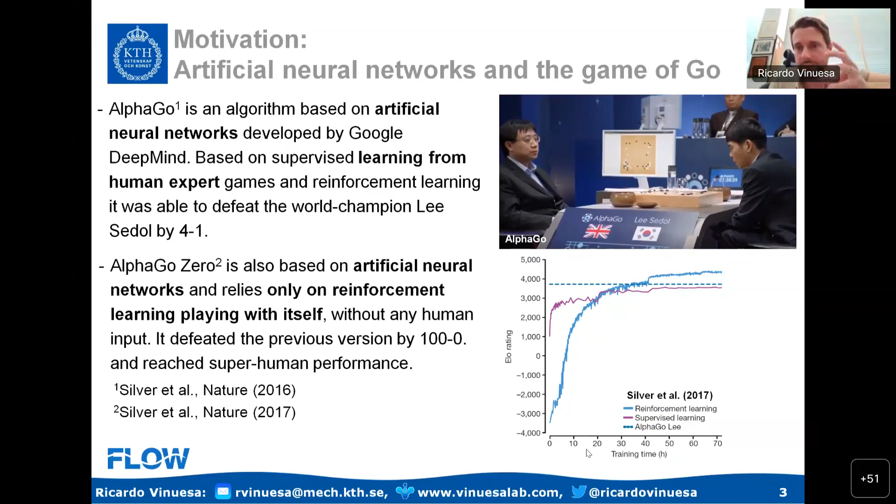So actually, there was quite some interesting potential of this technology for this narrow task without using any human input, just using the strategies that were developed through self-learning, playing against itself in this reinforcement learning context. So there are quite some interesting areas where machine learning can actually be applied.

We have a recent article in Nature Communications where we looked at how AI, more generally, can affect the sustainable development goals of the United Nations. It turns out that 79% of these goals can be positively affected by AI, whereas 35% can be negatively affected by AI. One should be aware that even if the result is mostly positive, there are many negative areas to be aware of when deploying these technologies, and the environment and the society appear to have the largest positive potential of this technology.

Now, we were talking about interpretability before. Of course, many of these deep learning models are actually acting as black boxes, right? So it's really not possible to establish a clear connection between the inputs and the predictions obtained from those inputs. And we argue in Nature Machine Intelligence that for any applications with some real impact on society, on sustainability, on engineering applications, one needs to develop interpretable methods.

And there is some interesting work from Cranmer and others from Princeton where they added layers of interpretability on already trained deep learning methods. And we argue in our paper that that can also be achieved basically by symbolic regression, so that one can make predictions that can, in fact, generalize sometimes even more than the original deep learning model. This is quite an up-and-coming area of research, and of course, this is very relevant for a very wide range of applications.

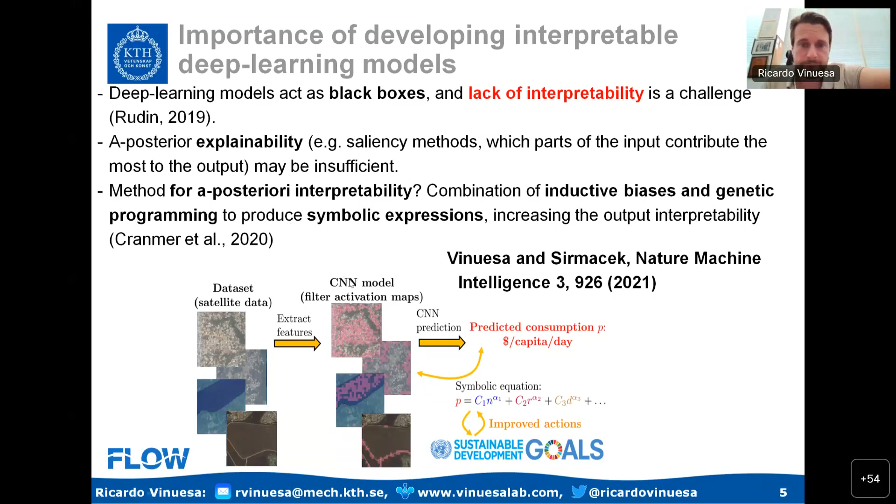My main topic today is going to be fluid mechanics. And machine learning has helped fluid mechanics in a wide range of areas. Perhaps a very seminal work 20 years ago by Milano and Koumoutsakos, where they could use neural networks to predict the near-wall region of a channel. That was quite an interesting seminal approach to these data-driven methods.

More recently, there have been studies looking at subgrid-scale modeling for large-eddy simulations, and RANS modeling as well. There has been quite some potential to generate synthetic inflow and boundary conditions that can help to produce more efficient CFD, which stands for computational fluid dynamics, so CFD simulations. And also, there are quite some interesting applications to flow control to reduce the drag or enhance the mixing, and to use PINNs, physics-informed neural networks, in the context of sensing as well. So there are some interesting directions where machine learning is already helping and can help even more for fluid mechanics.

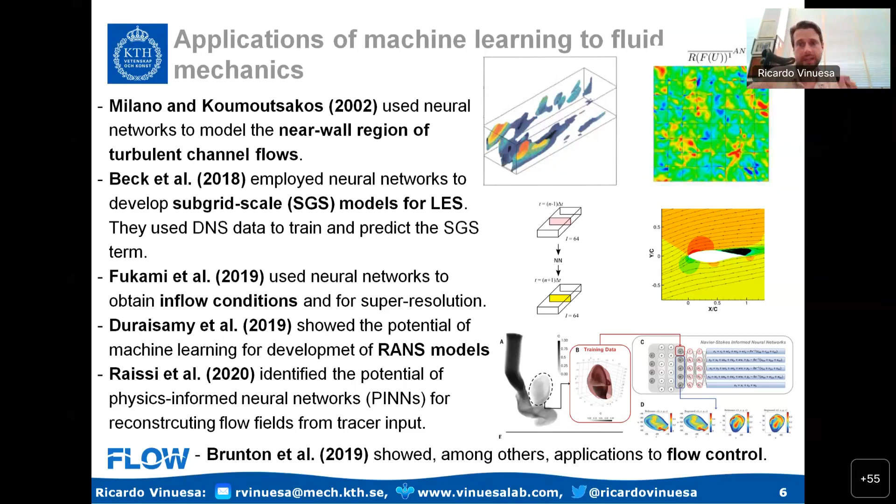In fact, we have just published in Nature Computational Science a review article together with Steve Brunton, where we highlight the potential of machine learning for CFD, for computational fluid mechanics. And what we find is that there is quite some potential to accelerate direct numerical simulations, to improve the modeling, both in the context of LES and RANS, and to improve the robustness and generality of reduced-order models. And I will be talking about that also later in this presentation.

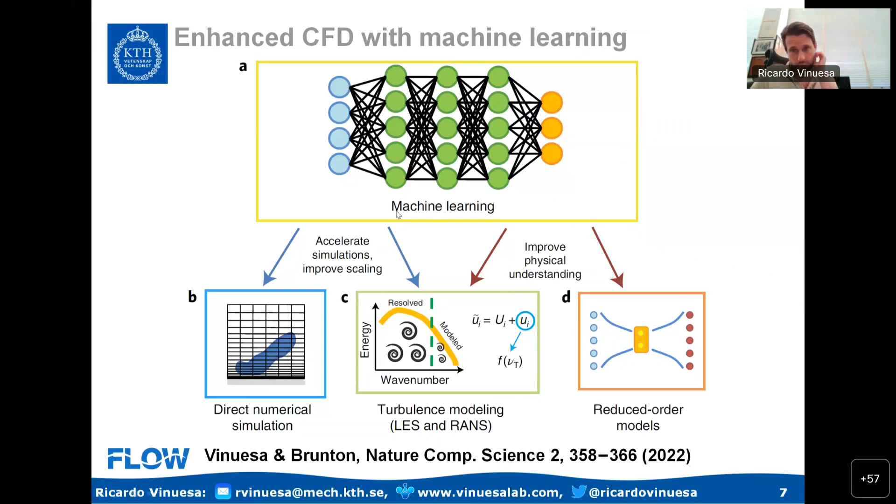So both in terms of modeling and acceleration of the simulations, there is quite some potential for machine learning, and you can read more about our perspectives in this review article that you can find here in this reference.

Okay. So today, I'm going to focus on several examples where we have used machine learning to either help the modeling of turbulent flows or enhance possibilities for controlling those turbulent flows. And the first example is what we call non-intrusive sensing. In non-intrusive sensing, we want to measure at the wall so that we can predict what happens above the wall in the flow without having to stick sensors in the flow itself.

Because of course, when we start to put the probes, we're disrupting the flow, we're creating other effects, and it's quite efficient to actually measure just at the wall and perform that prediction dynamically at each time step. So what we use is three quantities that we measure at the wall: pressure and the two wall shear stress components. And we use computer vision techniques, CNNs, but also other tools to predict what happens to the three velocity fluctuations at different wall normal locations above the wall. So above the wall, we can actually predict.

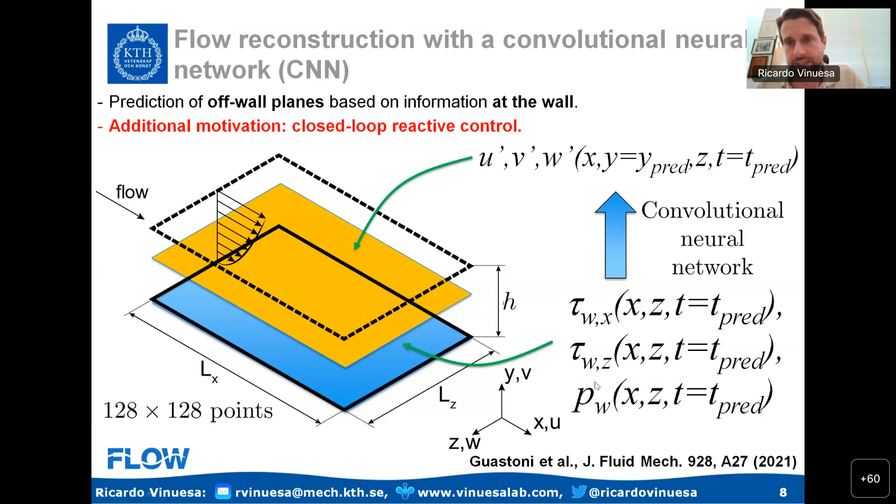And one motivation for this non-intrusive sensing approach is flow control. Because if we know what is happening in the flow at each instant, we can design better controllers to be able to reduce drag or do any other application that we may want to do with the flow. By the way, these results are presented in the Journal of Fluid Mechanics, so you can see the reference here by Guastoni and others, published last year in 2021. Okay.

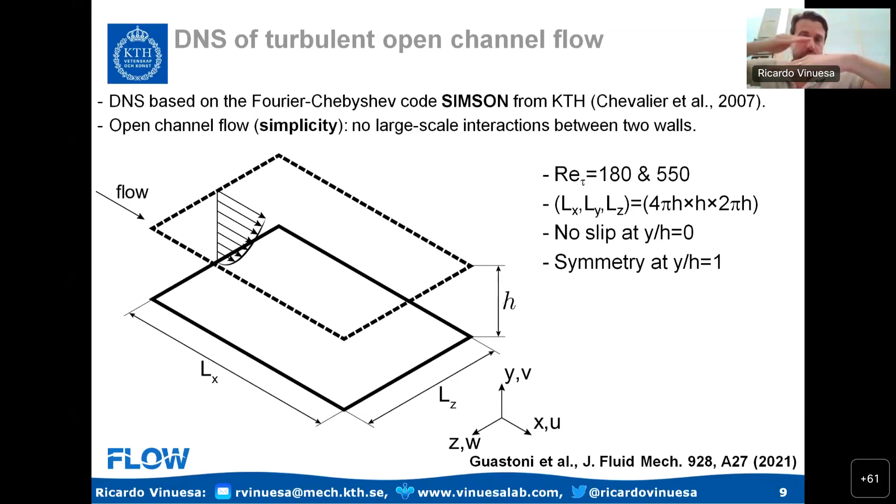So the first thing that we do is that we create a database of direct numerical simulations, DNS data, using a Fourier-Chebyshev code, and we consider a turbulent open channel. So we have one wall and a symmetric condition at the top. That's just to simplify slightly the dynamics of the large scales. We consider two Reynolds numbers, friction Reynolds numbers of 180 and 550. These are the domain sizes, which are large enough. And we use this DNS data, this highly resolved numerical data of the flow, to be able to train deep learning models to make the predictions that I was mentioning. So from the wall to above the wall at different locations.

And what happens is that turbulence exhibits coherent structures, right? So turbulence has certain patterns. And if we look at the wall, those are going to be 2D images. So of course, fully connected networks are not going to be very efficient in this sort of prediction. And we go to computer vision. So we start with CNNs, convolutional neural networks, to be able to exploit the spatial correlations of the data, which correspond to the coherent structures present in the flow, to be able to leverage those and improve our predictions.

So in CNNs, and I guess most of the audience here is very familiar with them, we essentially have a kernel, a 2D kernel, which can have a certain depth as well, which is sweeping through the input image. And then we obtain a feature map based on these convolution operations that are being applied. And in this case, since the kernel has size 3 × 3, each of the grid points of the output feature map receives information from 9 grid points of the input. And that depends on the kernel size and how we are designing the convolutions.

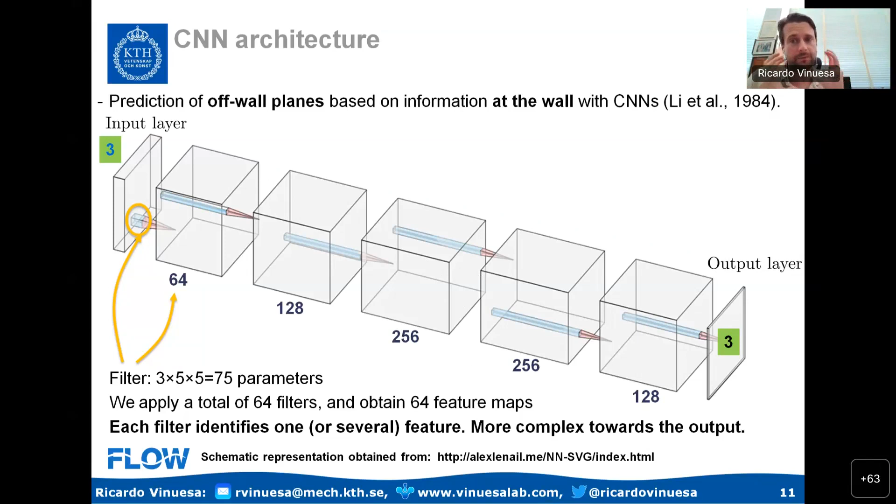So there's a quite nice fit there to predict turbulent structures. One additional note is that we have now been working on even deeper networks. So if you maintain the number of parameters constant, which means that we reduce the number of filters per layer but increase the number of layers, you can actually get even better predictions. And that goes in the direction of this concatenated application of convolutions that help us to really build very good and realistic coherent structures. Okay.

So this is how the CNN looks like. And again, this is the reference in JFM. So these are the three wall quantities that we are using as input. And these are the three velocity fluctuations that we're trying to predict. Okay.

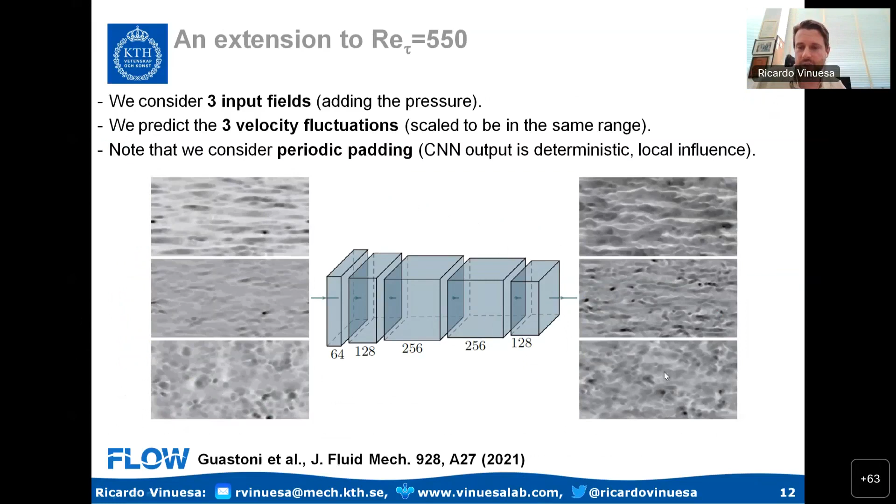Everything that I've shown you so far is what we call the FCN method, the fully convolutional network, which relies on taking information at the wall, which is just going to be a 2D plane, and predicting directly the information above the wall, which is going to be another 2D plane. But something that one can do instead is, rather than predicting directly the full plane, to do POD, proper orthogonal decomposition, or principal component analysis, depending on which is your community. So one can do POD on these subdomains.

Therefore, what we do is that we separate the spatiotemporal problem into spatial modes and temporal coefficients, and then we only need to predict the temporal coefficients of those modes, right? So this is in principle an alternative approach that can help us in certain cases, and this is documented in these two references, and this will be denoted as the FCN-POD method. So we will have the FCN and the FCN-POD.

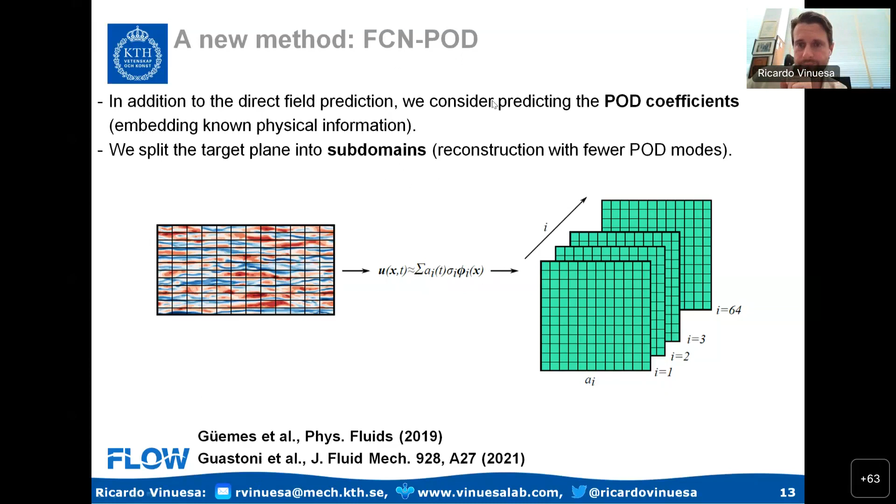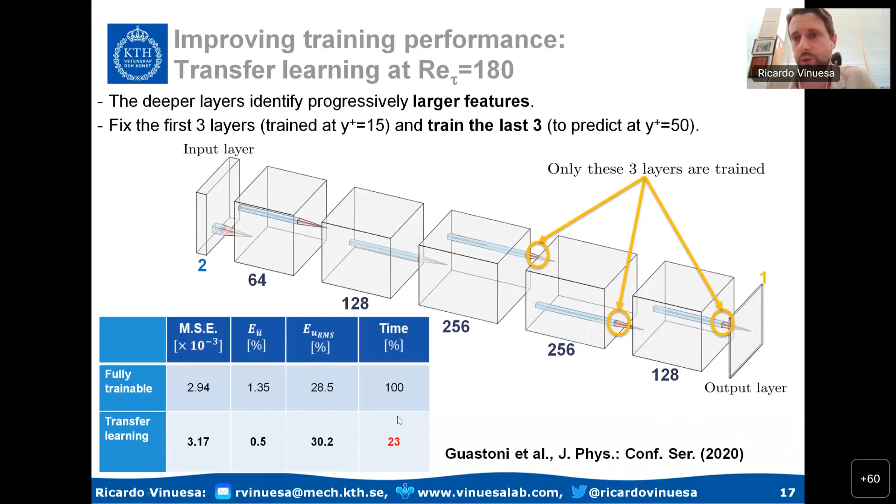And you can see all these results in the Journal of Physics Conference Series, also by Guastoni and others. Through transfer learning, we can get the same level of accuracy as with the original network, but reducing the amount of training time by a factor of more than 4. So we can actually train these networks for turbulence predictions in a more efficient way.

We also did this in the context of Reynolds number effects. So we took the network that we used to make predictions at Re_tau 180, and the training at Re_tau 550 was initialized from the weights of 180, right? So we transferred the weights, and instead of having random initialization, we just started with the weights of 180. What we can see is that we can reduce the amount of training data again by a factor of 4.

So we can actually obtain the same level of accuracy, but reducing much more the amount of data, and in this case, the simulation at 550 is much more expensive than the one at 180. So if one can do most of the training with a very cheap simulation that you can basically run on your laptop, then the requirements for high performance computing are significantly reduced, and we are doing something quite effective for the training of our deep learning models.

Now, what happens if instead of having the full signal at the wall, with the DNS level of resolution, you only have a few sparse measurements there, right? Which is what would happen in a wind tunnel experiment, in a real-world realization of this. Well, what we did was to employ generative adversarial networks, GANs, which again, many of the people in this audience are familiar with. This is a schematic representation of the GANs, in which we have two parts: the generator and the discriminator.

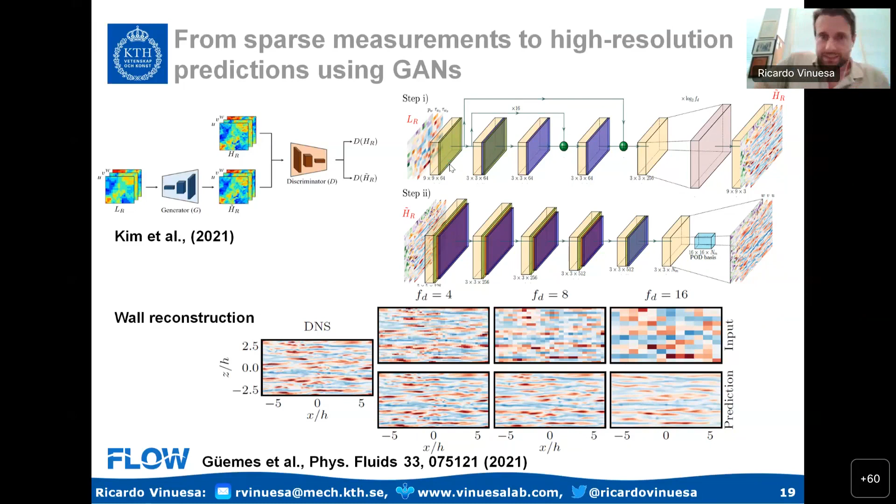So even if I want to target large-scale control, we can actually get very effective control approaches to be able to target these structures. So even for an experimental realization of this non-intrusive sensing plus flow control strategy, we can actually get very, very good results that can help us in the context of closed-loop control.

Okay. So everything that I discussed so far was based on predictions from the wall to above the wall for non-intrusive sensing. But one can think of the opposite problem. What happens if I want to use information from far away from the wall to predict the flow closer to the wall? And this is an important problem when one is thinking about off-wall boundary conditions, where one wants to replace the whole near-wall region by a boundary condition where you can develop good wall models.

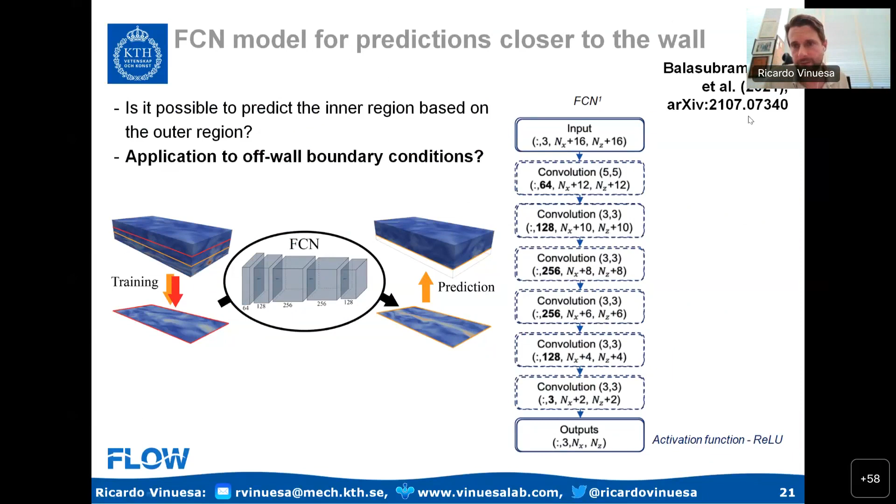And we try to use this via CNNs, right? This work, you can find it in arXiv, and this was presented at ETMM last year, so you can find the arXiv preprint in there. And essentially we try to reproduce some of the work that was done by Mizuno and Jiménez. So what they did is that they took the overlap region of a channel and basically rescaled the input and set it at the location close to the wall to develop a wall model. We tried to do something like that using CNNs.

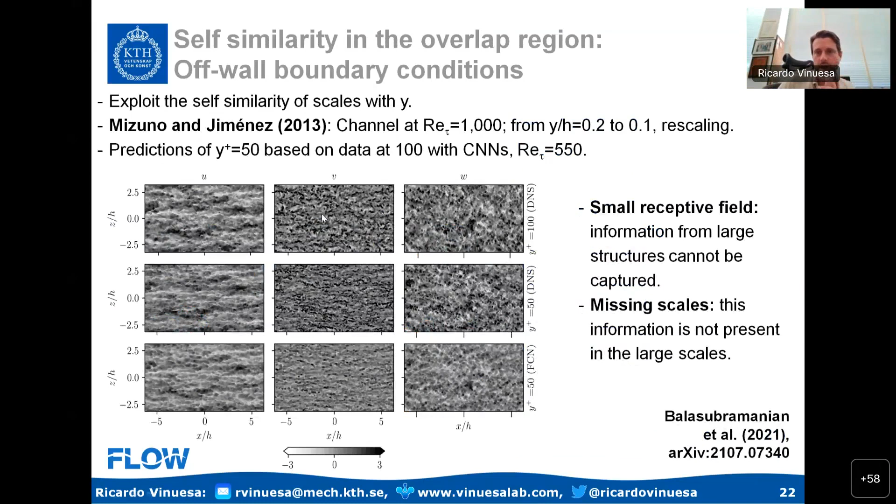And we consider the case at Re tau 550. We are having in the three columns the U, V, and W fluctuations. The input is at y plus 100. So these are the three input quantities. The output, so the prediction, which is closer to the wall at y plus 50, is the second row. So we're trying to predict these quantities over here. And the predictions are the third row that you can see here.

So we can actually see that visually, the instantaneous flow is in quite good agreement, and if we compare the second and the third rows, we can reproduce most of the features of the original data quite well. But this prediction is inherently more complex than the previous one for two reasons. When you're using the outer flow to predict the flow closer to the wall, you miss the effect of the small scales that is imprinted at the wall. So that's already missing when you're trying to make those predictions.

And second, when we are trying to use a CNN to predict from the large scales as input, the receptive field is going to be a small part of those large scales, which also complicates extracting the relevant information from those scales to make my predictions.

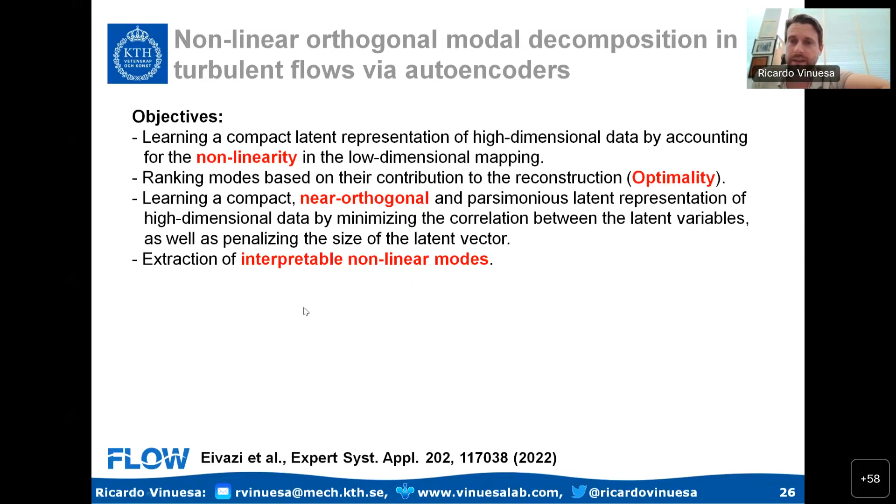So we consider different autoencoder-based architectures. The first one is the classical CNN autoencoder. As mentioned before, turbulence has certain spatial information and spatial correlations that can be exploited through CNNs.

That's why we employ the CNN autoencoder. As many of you know, an autoencoder is a deep learning architecture in which you're trying to reproduce the original data, reconstruct the original data, but you're applying progressively dimension reductions until you find a very compact representation of the original data in the latent space, right? Which is the bottleneck of the autoencoder. So this is the CNN-based autoencoder, quite standard.

The second one is the hierarchical autoencoder. And this one is aimed at obtaining the optimality property of POD. We want to obtain modes that are ranked based on their contribution to the reconstruction. And this was proposed by Fukami and others. The way that this works is that you have first an autoencoder configuration where the latent space has size 1, and that allows us to obtain the first latent variable, the first latent vector.

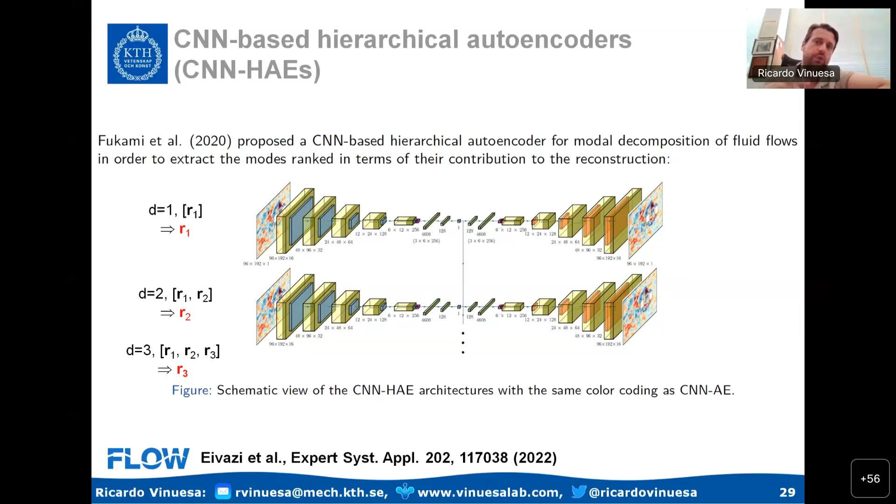Okay? None of the autoencoder configurations that I mentioned so far gives you orthogonal modes, and that's a desirable property if you are building a reduced order model, because you want the modes to be interpretable. Okay? To be able to embed the orthogonality, we consider beta variational autoencoders, which are ways in which we can introduce stochasticity in our model. So we consider that P of X is the distribution of the original data, P of R is the distribution of the data in the latent space, okay?

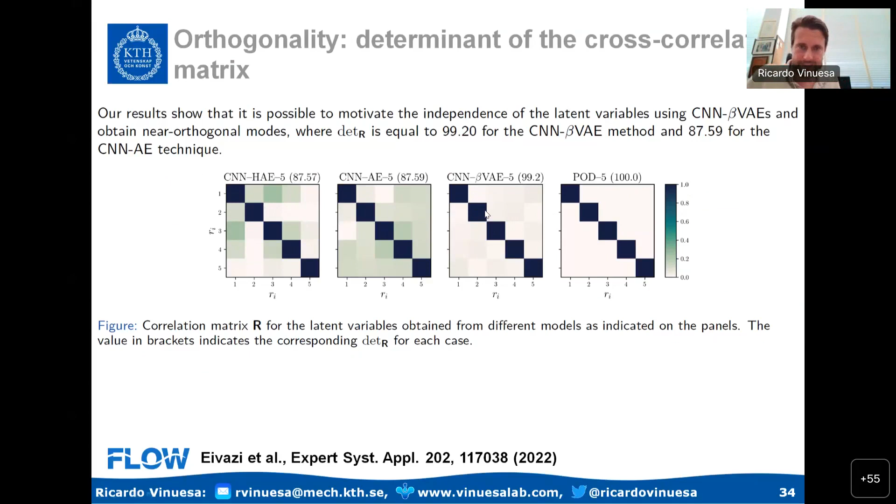And for the beta variational autoencoders, what we also did was to develop an algorithm for the optimality. So we are able to recursively classify the modes in terms of their contribution towards the reconstruction of the signal, so we can rank them from more to less contribution, meaning that we have an optimal reduced order model and an orthogonal one, right? So in the case of the beta variational autoencoder, those modes are very orthogonal. And why is that important for interpretability? I'll give you an example.

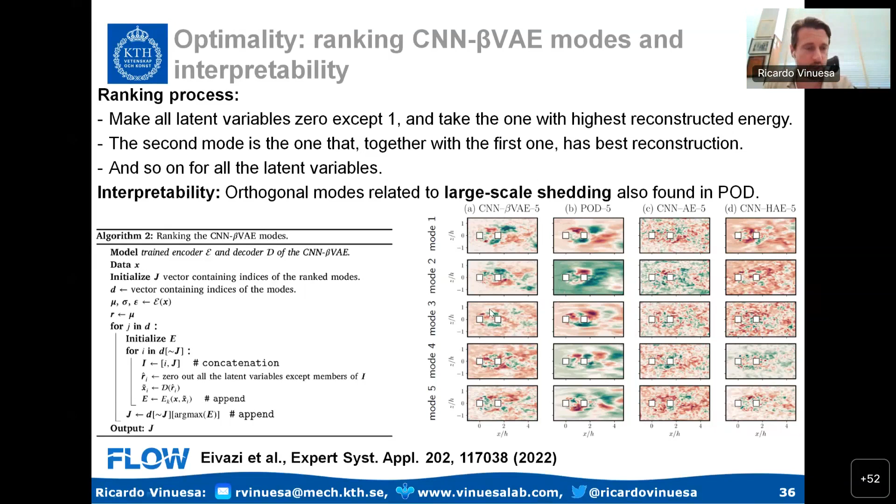And the last example comes from deep reinforcement learning for flow control. This was presented by Guastoni and others in the APS last year. Essentially, when we have a reinforcement learning framework, I have an agent, which would be the neural network, which is interacting with an environment, which would be the flow simulation that we are trying to develop.

Well, given the state of the flow, we decide some actions to be applied to the environment, and we obtain a certain reward that we want to maximize. So the goal of reinforcement learning is to develop a policy pi such that, given the state of the system, I can decide what are the best actions to be able to maximize the reward, which in our case will be to obtain the minimal drag in the channel.

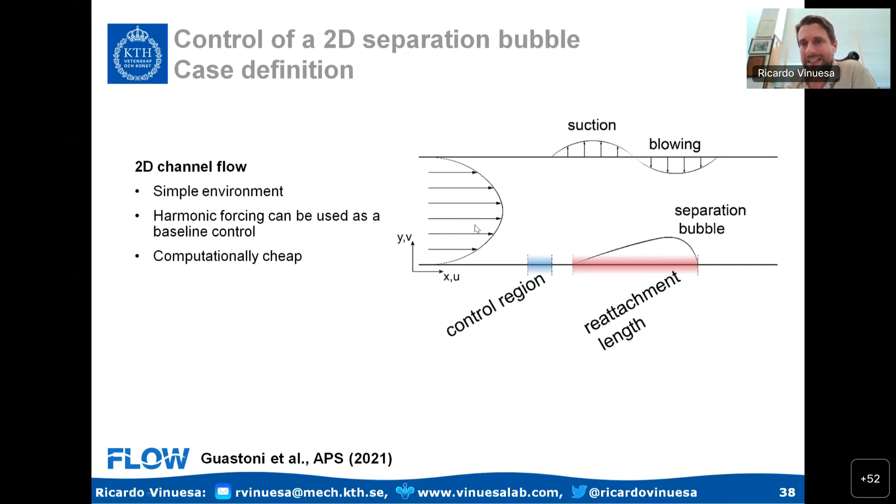In this case, we consider an easy example, a 2D channel, where basically through suction and blowing we induce a separation bubble at the lower plate, and through actuation upstream of that bubble, we want to reduce the length of that recirculation region. We have a classical solution that is periodic, and we want to see whether reinforcement learning is going to provide us a more nuanced, more sophisticated control approach.

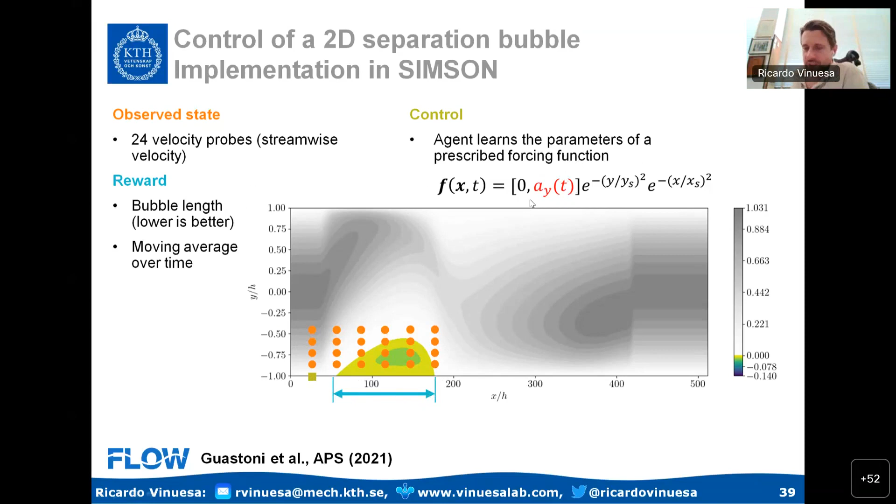What we do is we observe, so here is the flow field. In colors, you can see the negative velocity, so this is the bubble. The dots are the probes that we are using to sense the flow. The arrow will be the reward, so we want to minimize the arrow, the separation length. And this square here is where we set up the actuation, which is modeled through a body force that emulates blowing and suction, and we are trying to get the amplitude of this body force. So this is the setup for this 2D case.

We can compare the reduction of the separation length with the DRL and the periodic forcing. In the periodic forcing, we have around 20% bubble reduction, whereas with the DRL we get around 30%. So we get better performance with the DRL than with the classical solution, which is a single frequency and a bit more simple. And we are extending this DRL framework for flow control to perform opposition control in turbulent channel flow, to minimize the drag and control turbulence.

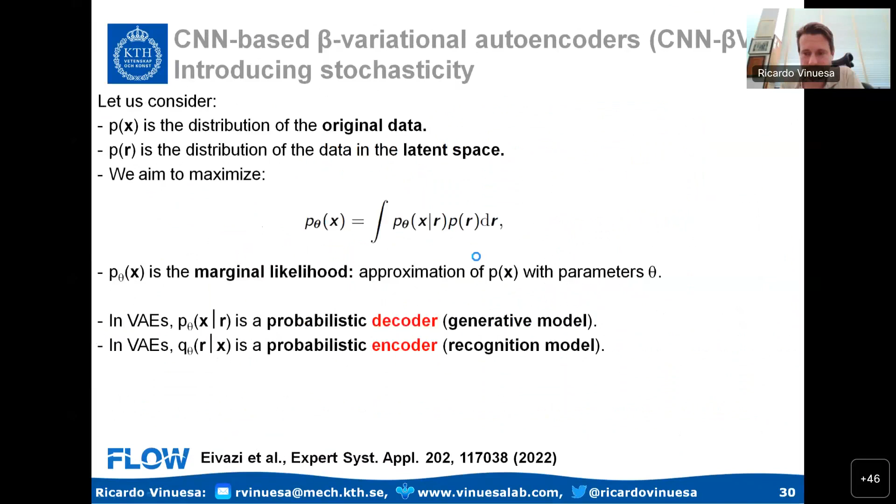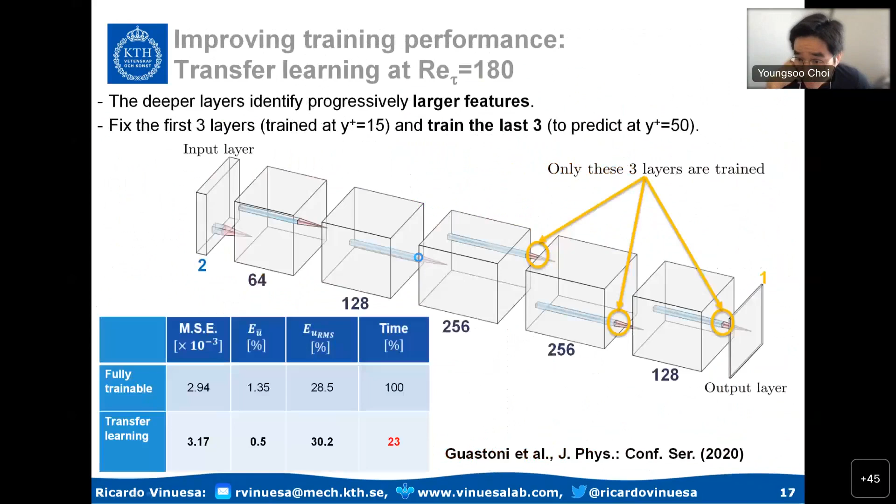So because we do predictions of 2D planes, it's a bit more difficult to get the three-dimensional distribution with conditional averaging for the different events that could happen. But in some recent work that we are currently conducting with my colleagues in Madrid, we are actually doing predictions of the 3D flow. So we're using GANs to do non-intrusive sensing of the 3D flow.

And then these conditional representations of the flow on particular intense events can be viewed in more detail in those 3D cases. Since these are 2D, it's a bit more difficult to really get good representations of the events in that conditional average. All right.

Well, thank you. Next question is by Pat. He asked, could you revisit what you are predicting? What are you comparing? It's related to the previous question. I mean, RMS has always been a questionable metric, but at least I want to understand where it's coming from. What are you comparing? Yeah, RMS, in the context of wall-bounded turbulence, this is a pretty standard physical quantity. I believe it's standard.

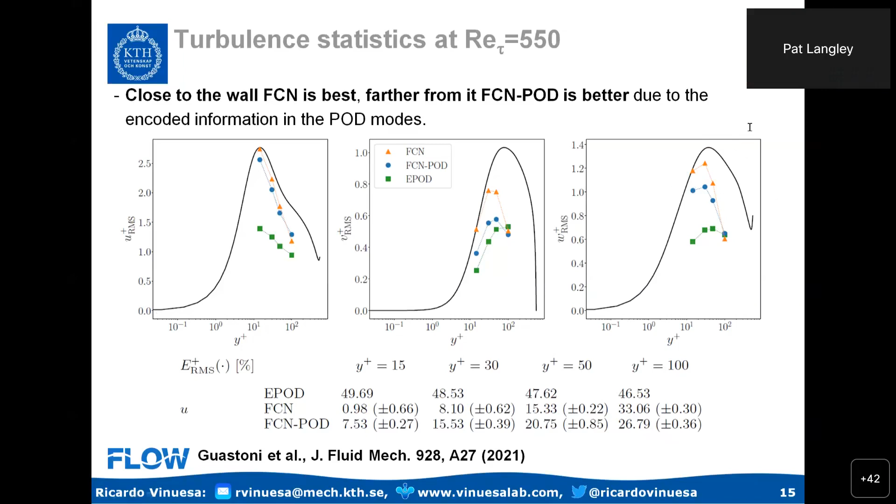It's just that if you start putting that in papers, you're going to make them less accessible to people who don't know what's going on. And AI in general, maybe fluid dynamics too, has really overused acronyms like this for decades. I just wanted to discourage it. That's why I was making fun of you. Well, unfortunately it's getting popular these days. I believe it. That's why we have to stamp it out now. Well, at least I highlighted in my slide what it stands for. But I agree that there are too many acronyms. That's absolutely true. All right, sounds good.

I mean, part of it is that I'm concerned, especially about hiding it, people are going to say physics informed neural networks as opposed to physics informed other approaches, because there are other approaches to doing physics informed model discovery. Yeah, that's true. So there's a subtle distinction that we have to be clear about. And I agree. In particular, PINNs.

From the name itself, you don't get the full picture of what it actually is, because it's more using the machinery of deep learning to solve PDEs. It's not so much embedding physics in the network. It's more just solving a PDE with the machinery of deep learning. So even in this case, there are some things one could actually argue about the name itself. So yeah, it's important to know exactly the methods that we are talking about and what they actually do.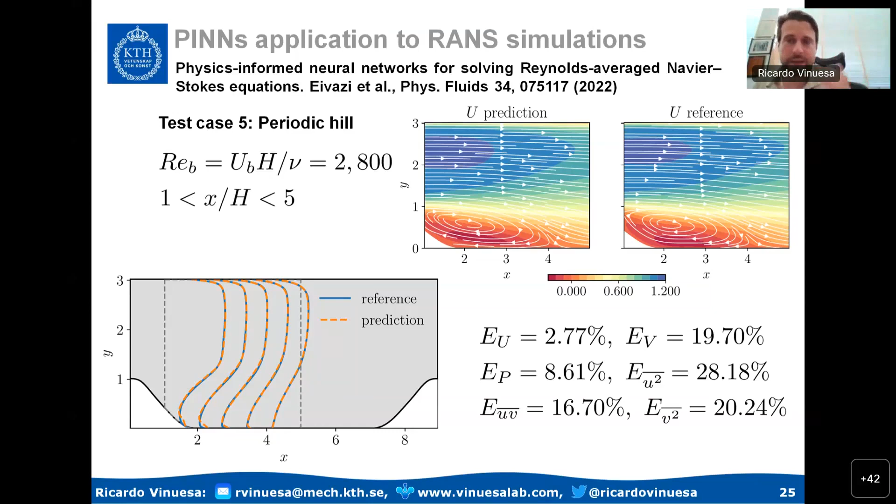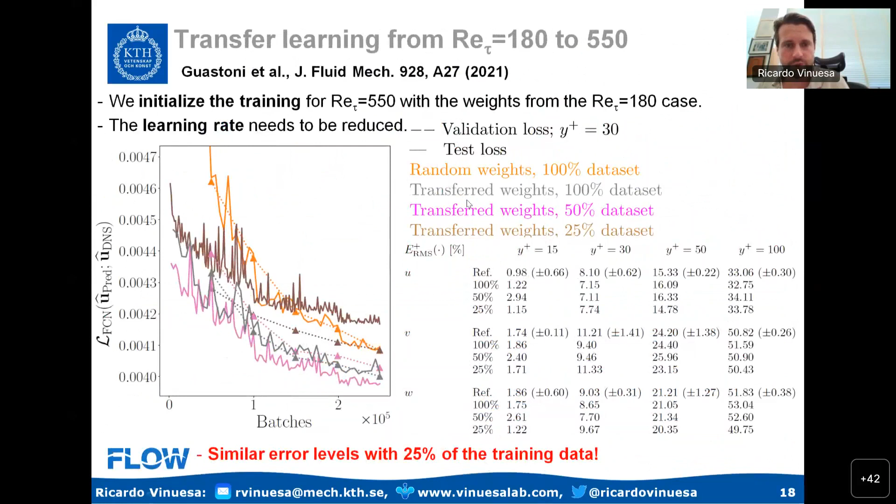But of course, another way that we have tried is through embedding in the non-intrusive sensing. So in these predictions that you see here, you can use some of the physical properties that you know about the flow, for example incompressibility, to simplify your prediction. So that becomes an additional step on the data-driven approach that you're using. Embedding physics in these neural network models becomes a little bit confusing with the nomenclature, because there are many different ways of doing it, and they get confused quite easily.

Yes. All right. Let's move on. The next question is by Jeremy. For the channel flows, do you have an impression if wall shear stress or pressure is more predictive for velocity fluctuations? I think pressure measurements may be easier for an experimentalist.

Yeah, that's a very good question. You're right. Pressure measurements are easier from an experimental point of view, although wall shear stress measurements are becoming more and more feasible with enough spatial resolution. It turns out that to predict u', the streamwise wall shear stress is the most important quantity, which makes sense, because they both contain information of the streaks. To predict v', the pressure is the one that is more important. So depending on what you want to predict, you may have to measure different things.

And this is something that we have also been analyzing in the context of the Shapley framework for explainability. This Shapley framework gives us something very consistent with the physical intuition that one can get for these flow cases.

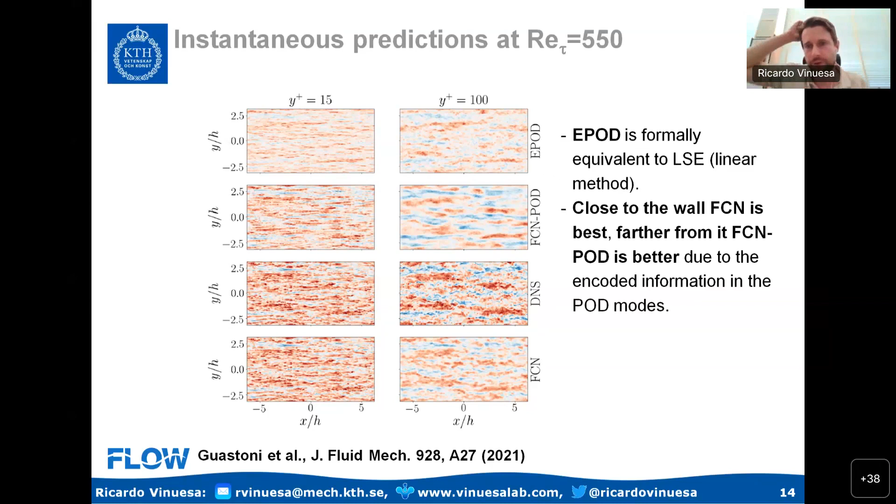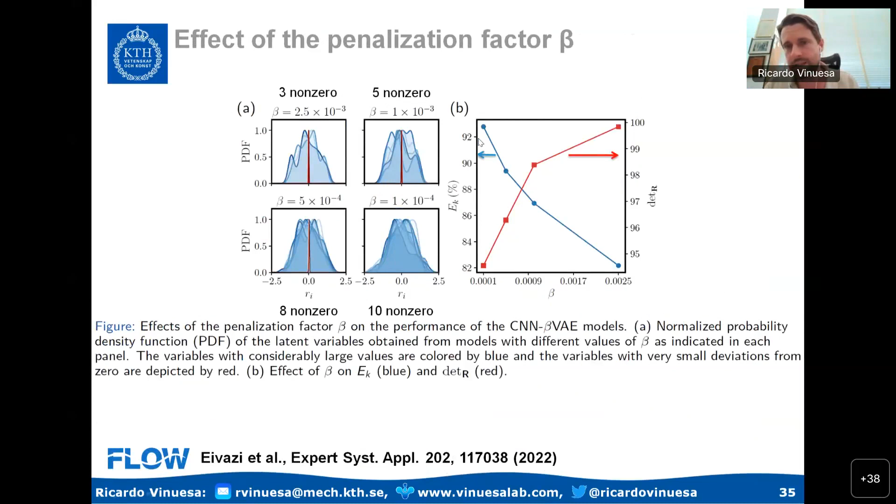For the reinforcement learning, it's expensive. Here I have some results as a function of the time step in a particular episode, but we're talking hundreds of episodes. These are the time steps of a particular episode, and that's for the 2D case. For the turbulent channel case, one needs even more. But we're using a framework where we have parallelized the exploration space, so we can have 16, 32 different processes running episodes in parallel and communicating, so that it can be done a bit more efficiently. But the exploration is quite costly in these cases, yes.

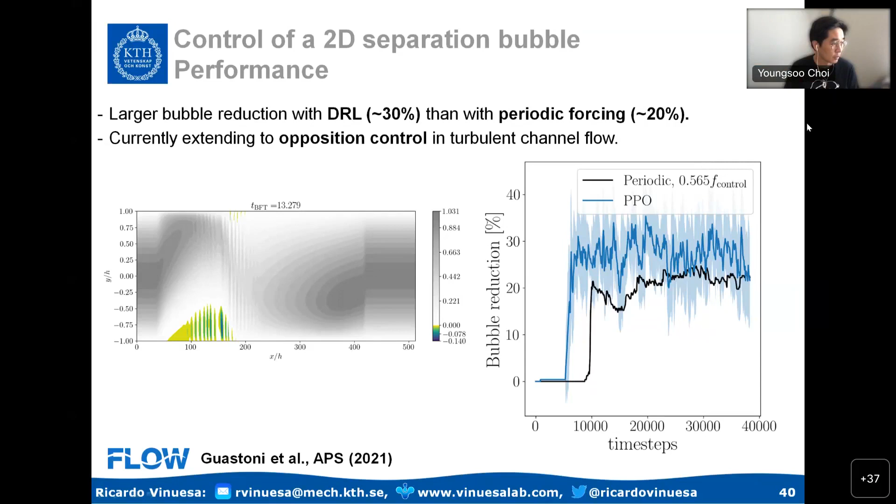Okay, going back to the PINNs, my questions. You need the collocation points. Yes. So how many collocation points did you use? This gives you an idea; this is an extra slide of the periodic hill. That's a typical mesh that we have for the periodic hill, so basically the amount of collocation points is a trade-off.

You don't need to resolve the gradients as much as you have in a RANS simulation. You have a coarser mesh, but still you need to be able to propagate the information of the residual from the domain to the boundaries, because the loss function needs to also match the boundaries. So you cannot get away with 3 points or something like that. You need a reasonable resolution, but it can be coarser than with other numerical methods. Right. Okay.

If you go to slide 27, you apply the autoencoder to some sort of 3D channel flow problem. The urban environment, the simplified urban environment. Oh, simplified urban environment. So the size of the data would be not this one, right? A high resolution.

So how big is the simulation data? So these are 1,200 instantaneous fields. This is a simulation that, if I remember correctly, is around 100 million grid points in the full domain. And we extract a 2D plane that is at the center of the obstacles, so cutting through the middle, and it's spectrally interpolated on a mesh of this size, so 96 times 192 grid points. So we really reduce the amount of data from the problem, although the multi-scale character of the complex turbulent flow is present in these snapshots that we consider.

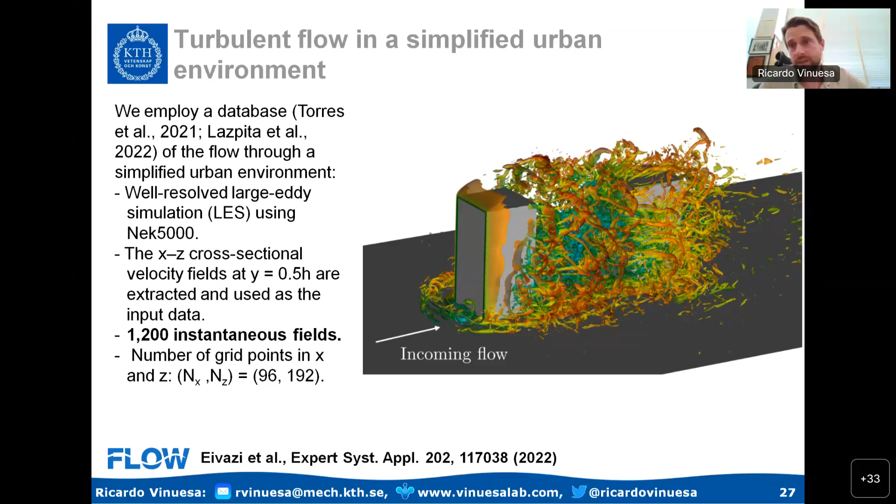All right. Another question by Juan. He asked, did you try different sampling strategies for the work of RANS with PINNs? And if so, did it make any difference in the results? What do you mean with sampling? I think he meant the collocation point selection. If you mean the grid, yeah, the collocation. Exactly. So for the collocation, it's connected with a discussion that we were having before. So yeah, we had to play a bit with the distribution of the mesh.

It's convenient to have, as you would have in any numerical method, finer resolution where there are larger gradients, but it's not a big requirement because of the automatic differentiation. The more important thing is that the points are quite uniformly distributed through the domain, so you can actually match effectively the boundaries. So that's the key. Because the problem with PINNs is that they will always give you something, even if the boundary data is not consistent with the flow, and things are a bit tricky. So you should make sure that your mesh is at least fine enough to be able to propagate that information effectively. And the quality of the boundary conditions is going to define also the quality of your solution.

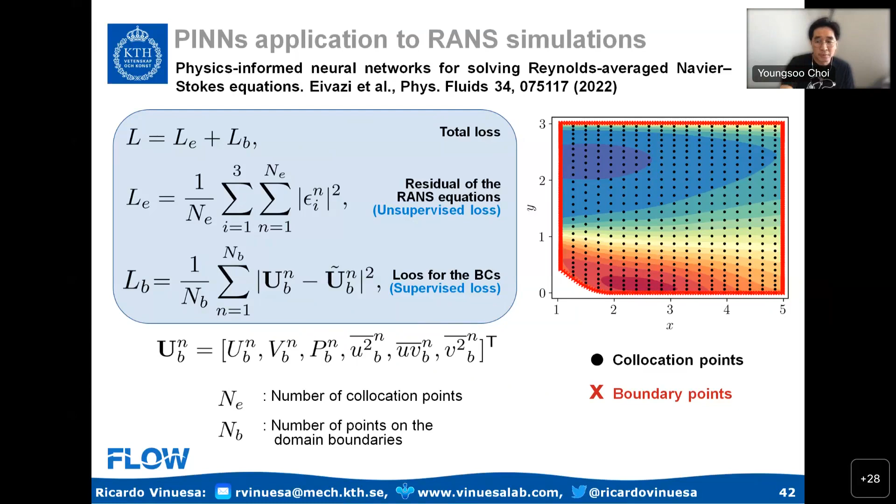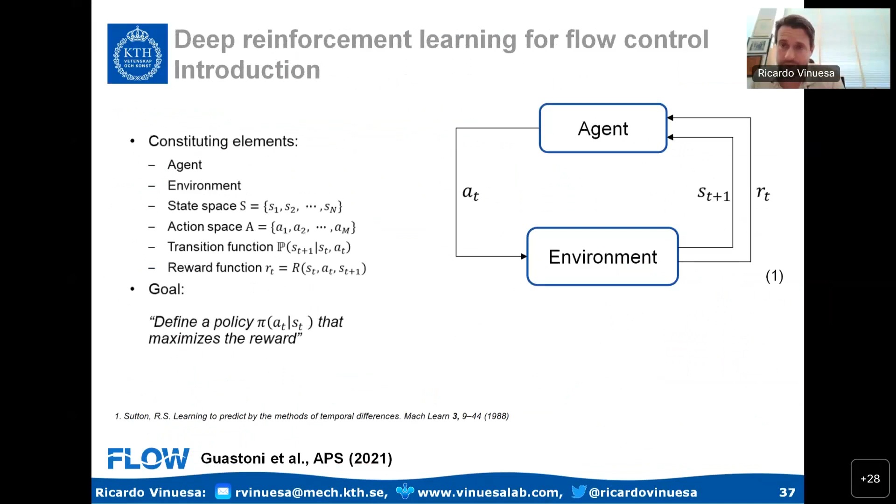All right. Last question from me. I think you introduced two different autoencoders for the reduced-order models. One was the hierarchical autoencoder, and the other one was the CNN-based autoencoder. Yep. When you compare those two autoencoders, which one was better in terms of the compression? So the CNN autoencoder was better. I can show the results now. The less things you impose, the better the compression. So I think the results are here, right?

So the CNN autoencoder gets 94% of the signal with 5 modes, the hierarchical 91%, and the variational 87%. The hierarchical with 5 modes is worse than the CNN because you have that additional property of optimality. I mean, it's ranked. But it's more interpretable for the hierarchical? So the hierarchical is not more interpretable, but the modes are ranked in terms of their energetic contribution to the reconstruction. So if you want to have a reduced-order model and truncate, the hierarchical is better. I see. Got it. Okay. Sounds good.